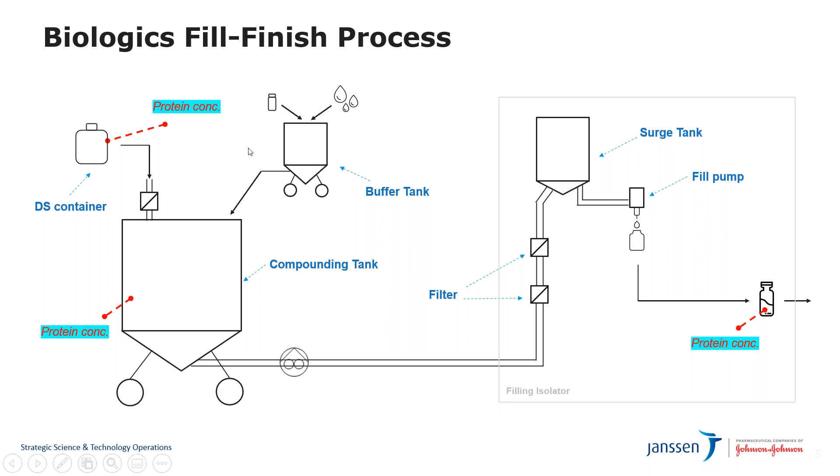But as you'll see in some of the case study examples that I will highlight in the next slides, we've gone about utilizing the FlowVPE for many other purposes rather than just lead time reduction. So initially it all started around what tool we wanted to implement for determining protein concentration. And I will not spend too much time on highlighting what FlowVPE is, because I assume that most people, or even all attending this webinar, do know what the FlowVPE system exactly is.

What I do want to highlight here is just the reasons why we, from a drug product manufacturing side, ultimately ended up selecting FlowVPE over other technologies that we also evaluated. There are a couple more details that I'll talk about at a later point in this presentation, but just from a high-level perspective, I think there were two very important reasons, and one is that we do have a very broad variety in concentrations that we typically see as part of drug product, right?

So as said, we have highly concentrated solutions coming into our facility, and sometimes very low diluted concentrations exiting our facility. So we do see a whole breadth of concentrations in our processes, and a tool such as FlowVPE is really capable exactly of determining that with one specific piece of equipment.

And then I think the other reason was also that it's still a UV-based method, and because of that reason, it utilizes all of the product information you already know, in contrast to other technologies like near-infrared, for instance, that would require you to build a specific model that would be able to extract the quality attribute that you're looking for.

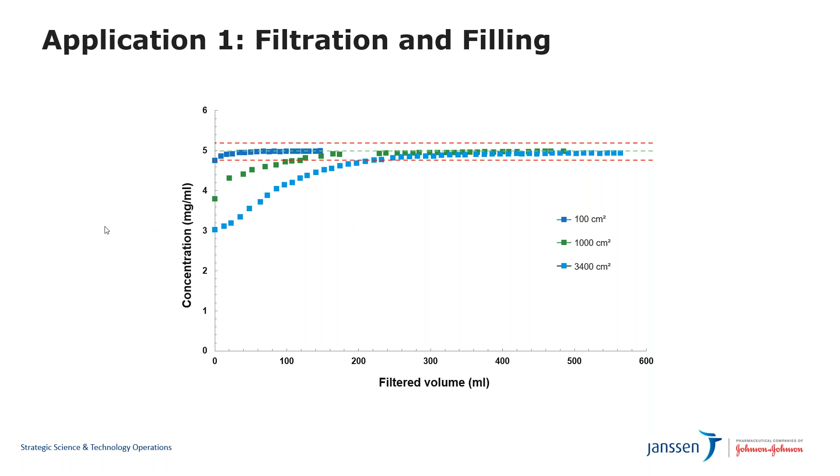Good. And maybe just a last aspect of the filtration study. I'll not go into the details on this slide, also because this data was generated not by me but by our drug product development group. But again, having that sheer amount of data coming off one tool allows you to do much more, which otherwise might not be possible with traditional sampling approaches.

In this case, we put all of that data into a scientific model to characterize the protein adsorption, which you can then use to perform virtual experiments that you don't want to repeat, or can't repeat in an actual setup because you have no material available. So an online tool such as FlowVPE and modeling go very nicely hand in hand to generate a lot of data that otherwise might be very difficult to obtain.

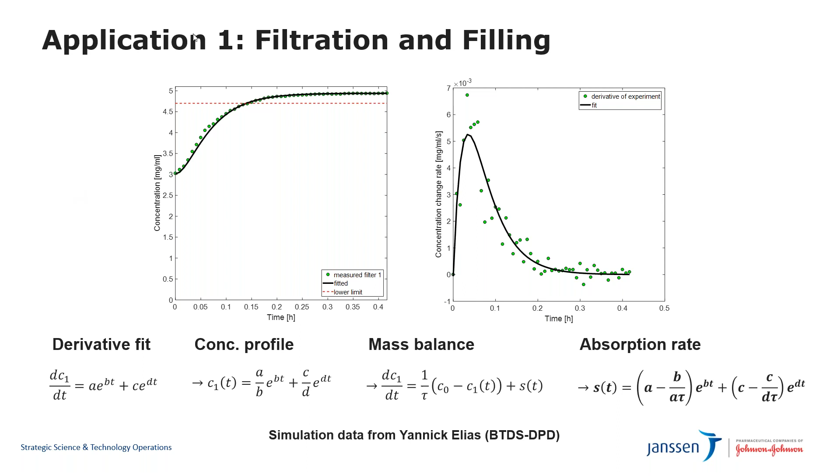A second application where we have evaluated the usage of the FlowVPE was the filling process. Once your solution has passed through the different filters, you start to fill it into the primary container. What we did there is monitor the protein concentration during the process when you're filling a solution into the vial or the syringe.

If the previous graph was not boring enough, this one for sure is, because over a period of around 6 hours we just monitored the protein concentration, and there is actually nothing to see in this graph: a really constant reading as a function of time. But even if this is a relatively boring graph, I think it is very important to showcase two things.

One is that here again, the FlowVPE can really be used for initiatives such as real-time release. Having a FlowVPE installed during your filling process allows you to determine the exact protein concentration of your solution entering each individual vial.

If we're talking about maximizing product quality, instead of having a batch of maybe 20,000 vials or syringes and sampling 3 of those to determine your protein concentration with a destructive test, this allows you to have 100% monitoring. For each individual vial, you know the content of that vial. And as said before, protein concentration is one of the most critical quality attributes because it determines the dosage the patient receives.

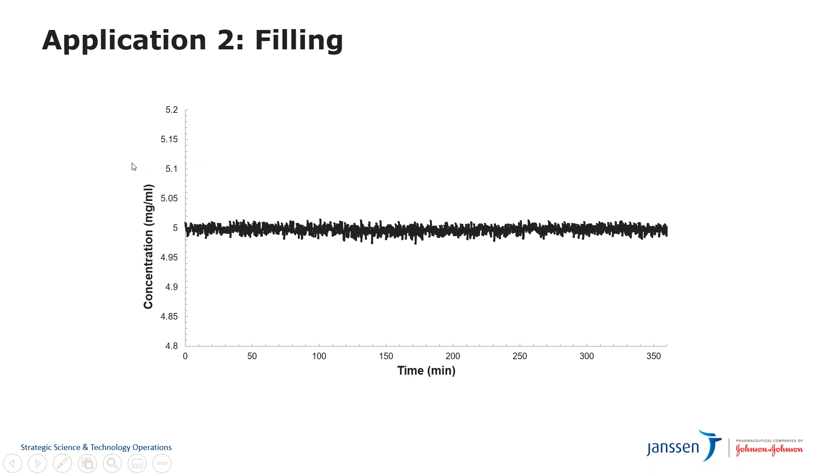The third application I want to talk about today, and I'll talk about it more throughout the presentation, is a dilution process. The reason I want to spend more time on the dilution process is that here we see the usage of the FlowVPE not only for monitoring, but also for more extended usage, for instance controlling the manufacturing process.

When we talk about a dilution process, traditionally that would be a 5-step process. In step 1, you create a formulation buffer which has all of the components except the protein. In step 2, you take the protein as your raw material, a highly concentrated solution. Then you need to mix those two together to end up with your final formulated product that you will filter and then fill into vials or syringes.

So traditionally, how we do that is that in step number 3, we'll take an actual sample of the incoming raw material to determine, again here in the QC labs, what's the protein concentration, and then that data is being fed back to the manufacturing shop floor.

And then what they'll typically do is an operator will take that data and then will perform a certain manual calculation to determine what's the weight of the buffer that needs to be added to that highly concentrated protein solution in order to end up with the final diluted drug product compound. And then an operator will typically execute that process.

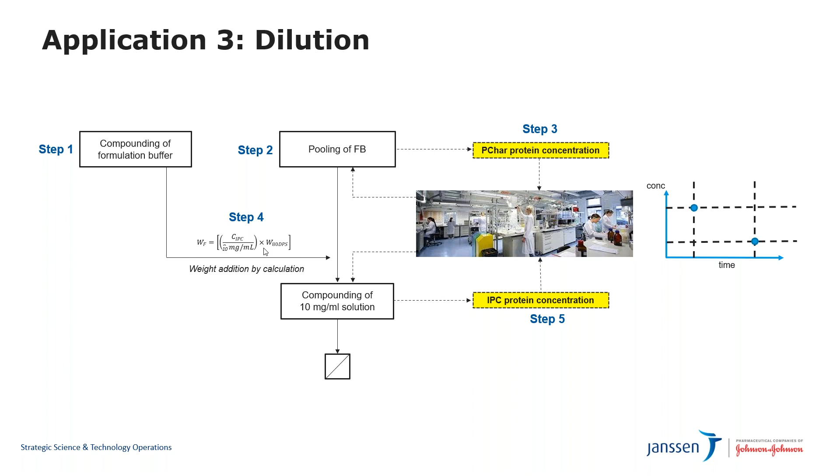There are a lot of potential errors, let's say human errors, that could come up in this process. And what we have seen here specifically is that just implementing the FlowVPE as part of this whole process will eliminate to a large extent that issue. So what we are now typically doing as part of a dilution process is that this is still a 5-step process at this point, and I'll go to further optimization later on in this presentation.

But for this 5-step process, what we are really doing is we're replacing the QC lab with the online FlowVPE instrument. So instead of having to perform a certain sampling, the FlowVPE is giving us the reading at the moment we have that raw material available to us, and that data is available within seconds rather than hours. And then with that data, an operator is able to calculate and determine how to execute the process. And once that's completed, also within seconds, we again have the data coming from the FlowVPE instrument to give us the pass or fail, whether this process has been executed correctly, yes or no.

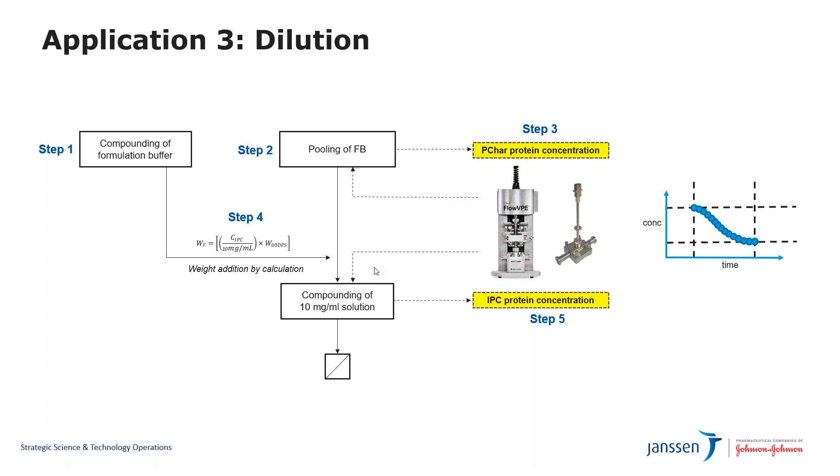So from a benefit perspective, implementing FlowVPE as part of our dilution process has, on one hand, really allowed us to have a significant time reduction, because here we're not waiting for the samples to go to the lab and data to come back, but we're having the data really on the shop floor.

And then, as said as well, we're not just monitoring the beginning of the process with an offline sample and the end of the process; we're able to generate, every handful of seconds, a protein concentration value. So having that wealth of data throughout the whole dilution process also allows a potential prevention of execution failure.

So if there was a human error that went into that calculation of how much buffer needs to be added into the tank, then FlowVPE would actually see that we're maybe going much faster towards the target concentration, and we might potentially overshoot the target concentration and over dilute the product. Having that real-time data available is really putting the operator in a better spot to make good decisions and fast decisions around execution of the batch and execution failures that might have occurred.

And then maybe just the last comment is that now you're bringing that tool really into the hands of the operator, which also removes the need for very strict communication between the different departments. You have an operational shop floor, you have the QC department that's doing the testing. So imagine during a night shift where you need to coordinate whenever you're going to pull the sample and send it to the QC lab. What if there is nobody there to support the testing? So by having this online tool directly available on the shop floor, this really enables that operational flexibility, because it's all in the hands of one specific group.

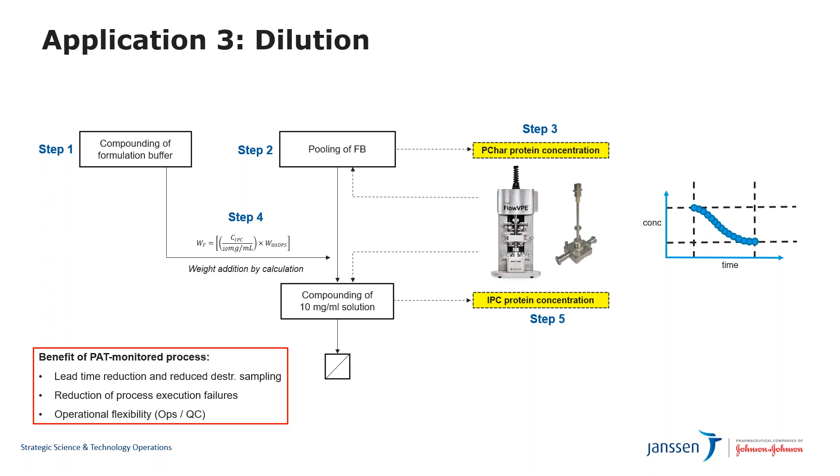Good. So with that, I just want to wrap up the first part, where I hope I've been able to showcase to you the FlowVPE system and how we've been using it in drug product applications. We've been able to monitor almost every single unit operation step that we have: the compounding or formulation, the filtration step, the filling process. So we've seen value in utilizing the FlowVPE across the whole drug product biologics manufacturing process.

The main benefits that we've identified so far really is that you have real-time analysis of protein concentration, so you can omit the offline sampling and the offline analysis. But a very important learning for us after these initial feasibility tests was that we are generating a lot of data that we might not have been able to gather previously. Either it was because there was a need for a lot of sampling and destructive testing, or sometimes it was just not possible to have such a resolution in time to even capture the data with sampling approaches. So that was a very nice learning coming out of those feasibility tests.

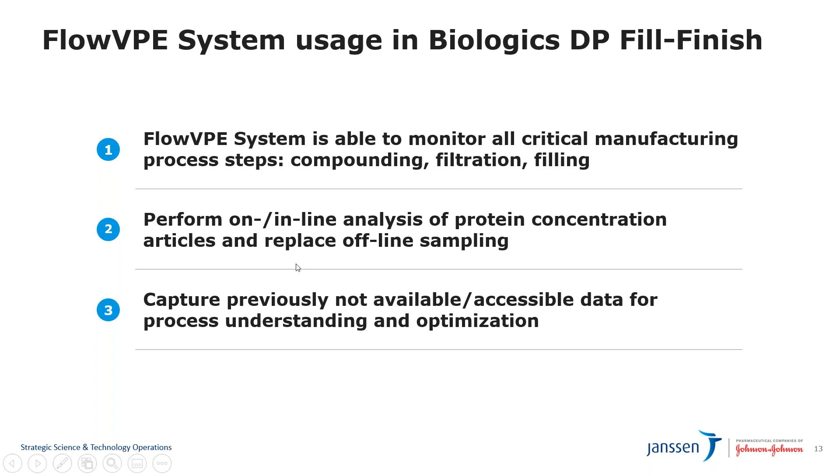Good. Then in the second part of this presentation, I want to give a bit more information on the actual implementation journey. So how did we introduce the FlowVPE into our GMP manufacturing processes, and which steps are crucial on that path. Before I do that, I want to emphasize that I might be the one presenting today, but this is really a team effort. You'll see on the next couple of slides that the input from all of these different groups and departments is required to have a successful implementation of a PAT tool such as FlowVPE.

So you have analytical development that will have to develop the method for the FlowVPE. You have drug product development that is doing a lot of the process development and is also looking at how and where in the process to implement the tool. We have quality control, we have quality assurance. We have manufacturing science and technology, the people responsible for the operations and linking it to an actual facility. And then we have technical operations that are required for cleaning validation, sterility validation, all of these different activities. I'll go in the next couple of slides a bit more into detail on the different actions we have undertaken from purchase of the instrument until implementation and usage in a GMP environment.

Good. And so basically that's represented on this slide. Within the organization we have a process that has been established around the implementation of PAT sensors such as the FlowVPE. And it also highlights all of the interconnected activities that are required and the different groups that are responsible for executing those activities.

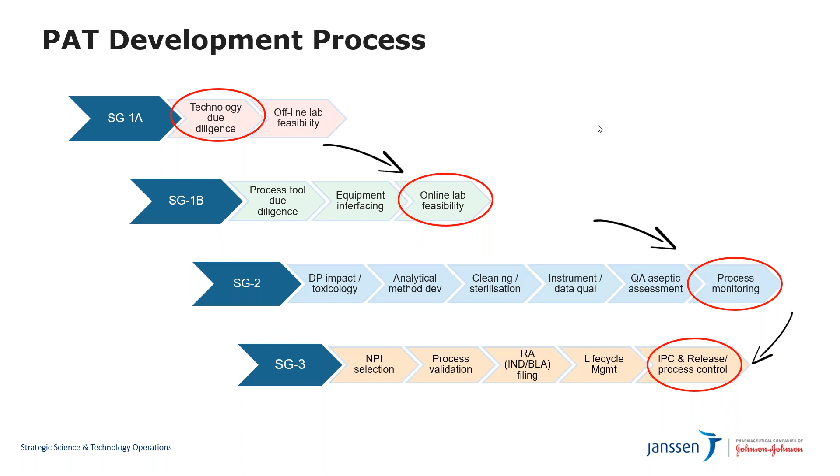If we have a tool that might be incredibly fast, but it's maybe only plus minus 5% accurate, it might be good enough for monitoring, but it might not be good enough really for IPC or release testing. So the fact that we have collected the data with these early feasibility tests that I showed you before with such a high accuracy using the FlowVPE tool was a very big decision point on moving forward with this technology.

Second specific reason was really around any potential background effects, right? So within drug product, we do see probably not as much as in drug substance, but we also see a lot of influences coming from, let's say, raw materials that have certain small differences, different batch varieties, where we also want to have a tool that is able to give us the attribute that we're looking for without having to compensate for a lot of these different background effects like pH changes, for instance, that will take place during our manufacturing process.

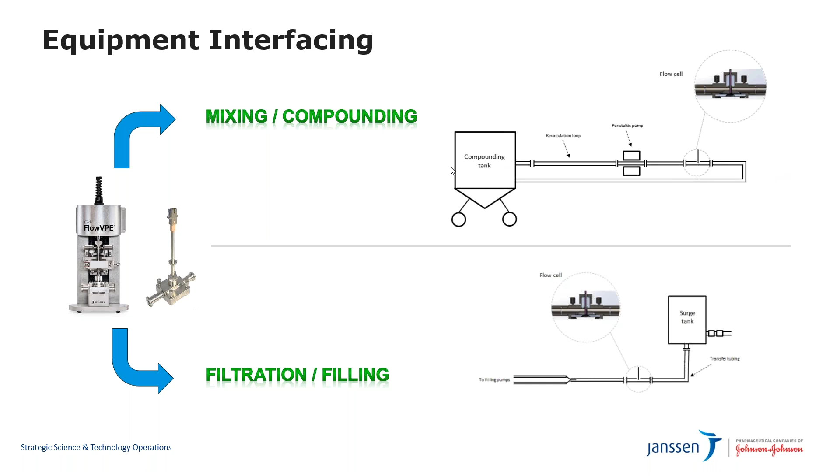And as you can see at this point, it really looks like a very much customized setup, so not at all ready for final production, but at least good enough to understand the benefits and the drawbacks of the technology that we're evaluating. And so what we specifically did in this study was we looked at mixing studies utilizing various tank sizes, and this was in our clinical facility.

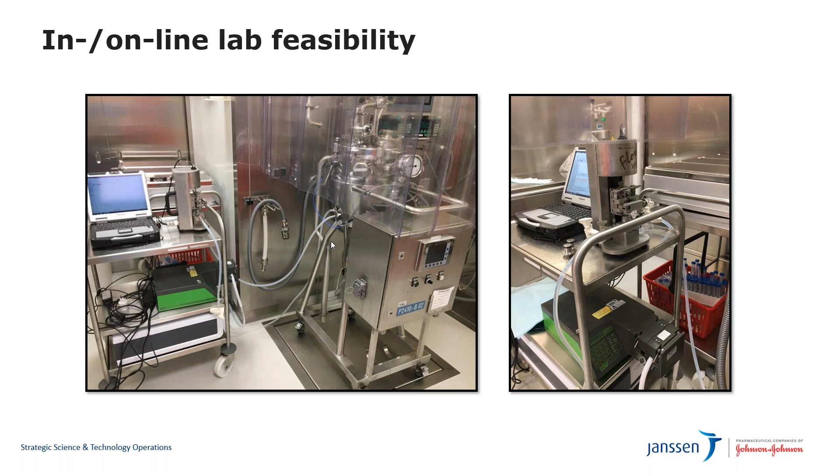And so once we basically have a technology that's now potential to be implemented, we've collected some initial data, we do have to go into that next part, which is really how do we bring it into a GMP facility. And I think one very crucial element that we had to do was to determine whether your change to the process that you're applying or the tool that you're integrating is in any way negatively impacting the quality or the stability of the drug product in case.

So in this example, we have a FlowVPE, which is continuously sending out UV radiation to the product. We also have, in the case of a dilution process, this recirculation loop that's continuously going around, extracting material, sending it for analysis, and sending it back into the tank. So that's potentially adding a specific stress to the product.

And then on top of that, you're having all of these materials from the sensor and the recirculation loop or other parts that have potential leachables and extractables that might have a toxicological effect on the patient. And so all of these elements need to be evaluated and verified, that the impact on the patient and on the drug product quality and stability is not negatively impacted by the usage of a tool, as well as any of the auxiliary equipment needed to accommodate the tool, like the recirculation loop and the pump.

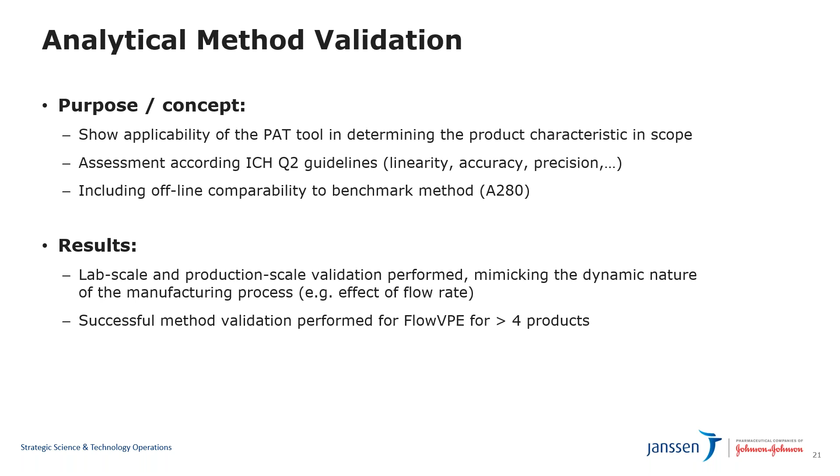And then last but certainly not least is the whole cleaning and sterilization validation exercise. So you have a lot of parts coming from the sensor, as well as all of the auxiliary parts you would need to interface that sensor, and they need to be cleaned, they need to be sterilized.

And there is no one approach that fits all; this is very highly dependent on how the tool is going to be used, whether that's part of the filling process or the compounding process, so after or before the sterile filtration. But in any case, there needs to be assurance that the cleaning processes are able to clean all of the residues from the sensor, and also that the sensor is able to withstand and survive the cleaning process.

And then the same for the sterilization process, it needs to be able to withstand multiple times for extended durations as well the sterilization procedure. And that's really a very critical item to tick off, so to say, as well, right? So in our case, the FlowVPE, we are cleaning out of place using a small parts washer instrument, where we have successfully completed the cleaning validation on multiple products, on all of the FlowVPE components, whether that would be the flow cell, the fibrette, the auxiliary connectors, and all of these, where we did swab and also test for organic carbon, bioburden, and endotoxin residues.

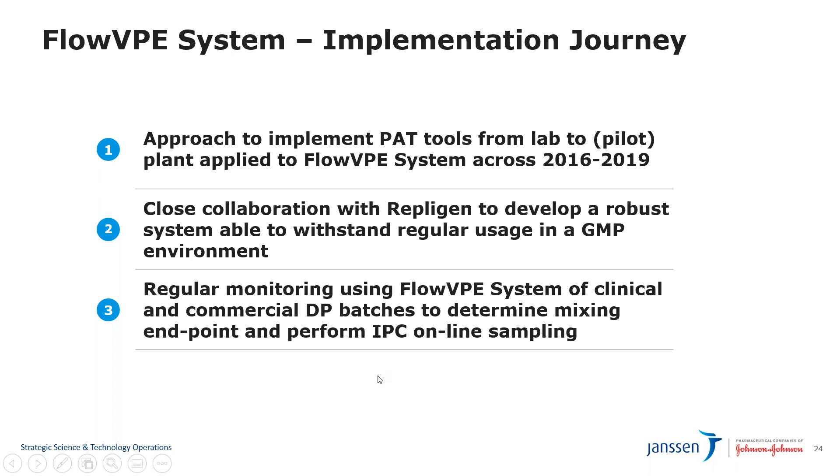And as I said, what we currently have established is that we're regularly using the FlowVPE system on our clinical and commercial DP batches in various applications, right? But the most common application at this point really is the mixing endpoint during formulation, as well as at the end of the dilution process, and then also performing the official IPC at the end of the process.

And just in the third and final part, and I also want to do a time check, so I want to probably start wrapping up here as well. But I just wanted to shed some light on what else we can do with FlowVPE and what's the journey that lies ahead of us, right?

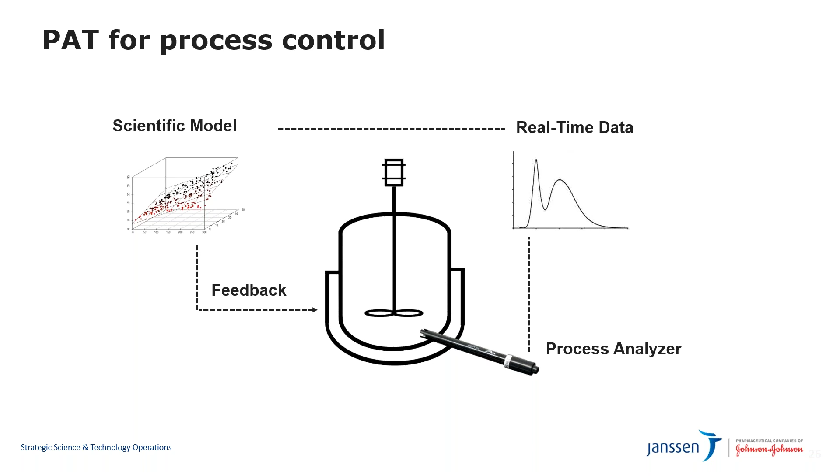And maybe just a very simple sketch on PAT in general. So PAT is not only a sensor that you implement into your process and you collect data and then you transform the data into information for what you're looking for, in this case, protein concentration. But what is also very important is that sometimes we really want to use that information to feed back to the process, right? So to control the process and really step away from that manual, very iterative manufacturing process that we typically have.

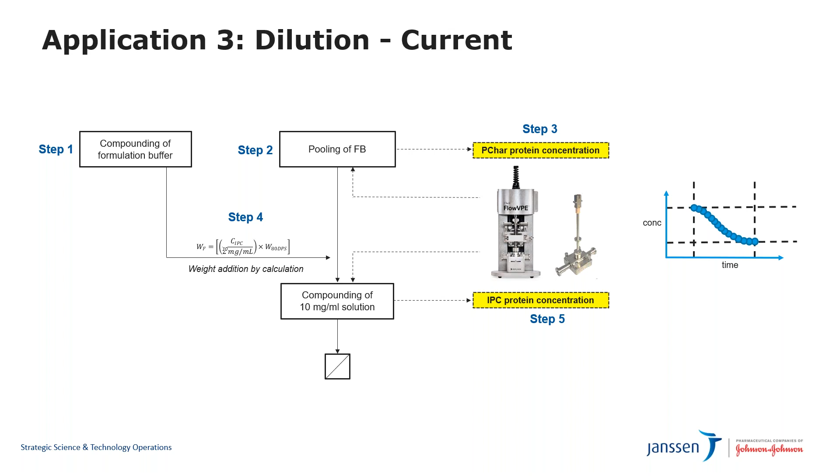And so to come back to the example I highlighted before on the dilution process, when we have the FlowVPE implemented, we're already making the process much more timely. We have a strong lead time reduction. We're removing potential causes for human error, but we do see that there is still the potential to improve that further, right? So how we see that in the future is that we're going to step away from that 5-step process and go to a 3-step process.

So step 1 and 2 stay the same, but instead of having that sampling in the beginning, performing a manual calculation and then sampling again at the end when the process has been completed, we're going to use the FlowVPE in a real-time continuous mode where the FlowVPE is continuously analyzing the concentration during our process, and then a model predictive algorithm is going to drive that process rather than having an operator perform manual calculations. And so with this, you're fully utilizing the whole concept of process analytical technology, not only for monitoring, but really to control the whole process.

So you're really at this point removing the human person, which is the most, let's say, reliable origin of errors sneaking into your process. So removing the human intervention, not having it in the measurement in the QC lab, but also not in the manipulation of the process and the interpretation of the data coming from the sensor. And the additional benefit you get from that is much tighter control on the process, and at the end you end up with a much more robust product quality exiting your facility.

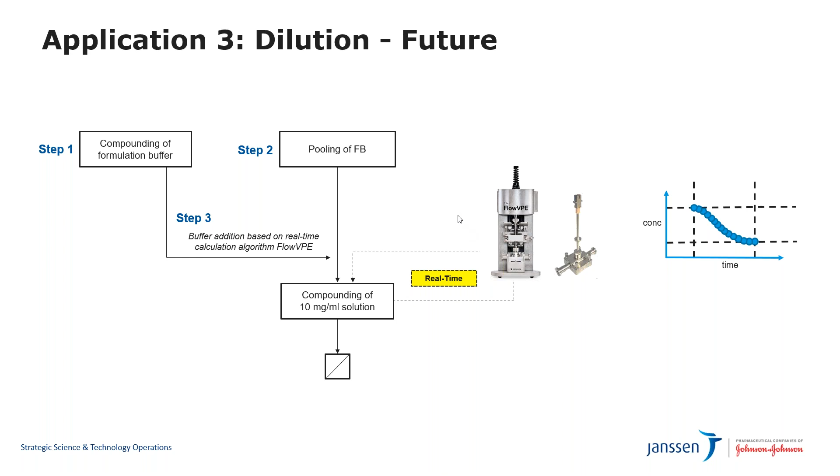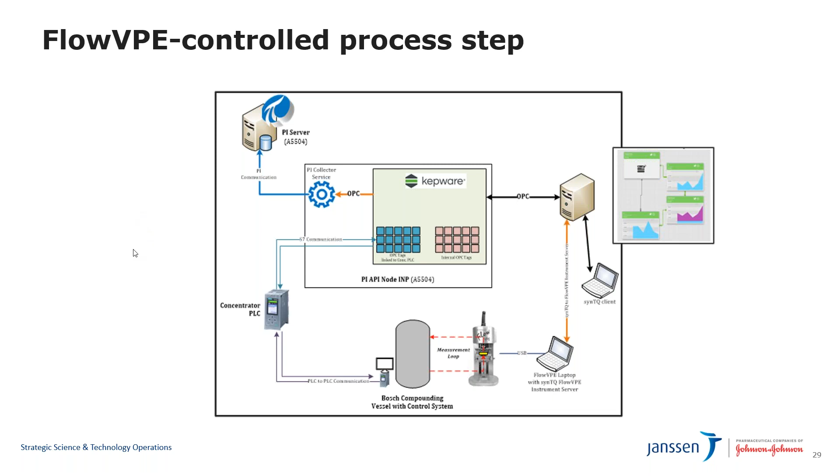and then ultimately finishes the process. And at the end of the process, the FlowVPE would also be able to perform your official IPC, your in-process control measurement, and then close out the process, and the operator can continue to the next stage. All of this also includes the automated review and the data handling.

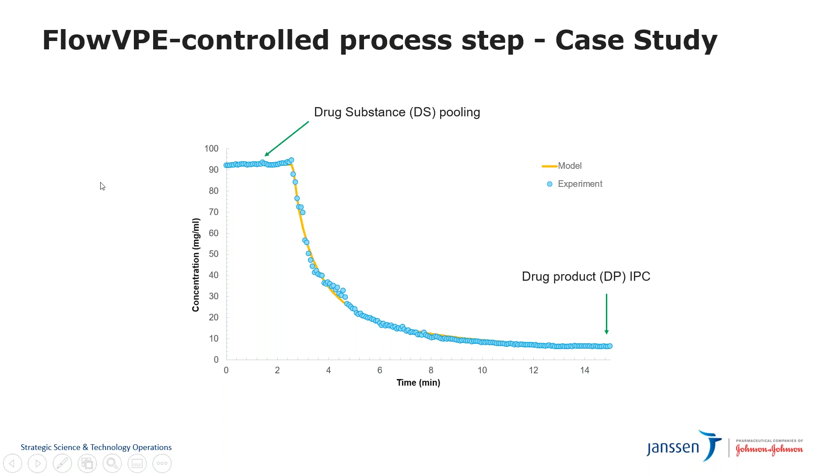I think that brings me to my last slide. So, next steps: what we're currently doing with the FlowVPE is to implement that fully controlled manufacturing process step. What we'll have there is significant lead time reduction, but also operational flexibility. And that automated control allows us to be fully free from human interventions.

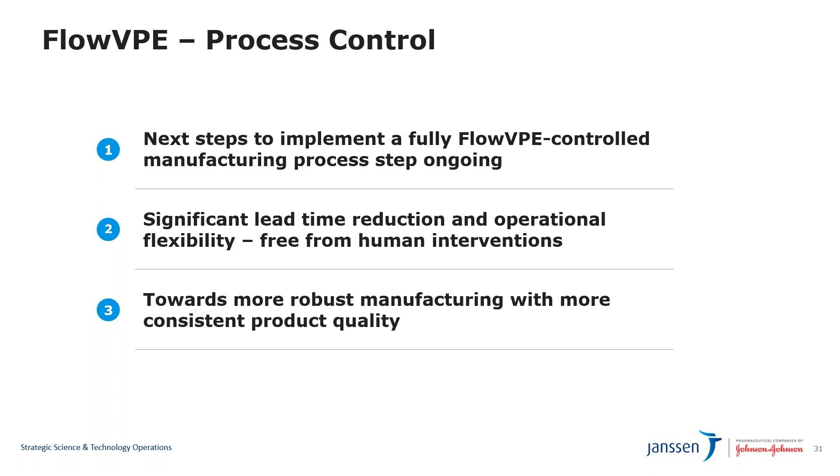And the end goal is to have a manufacturing process that time after time is executed in exactly the same way, irrespective of incoming material properties or environmental conditions. A model predictive algorithm should be able to execute the process in the most robust way, such that we end up with the most consistent product quality.